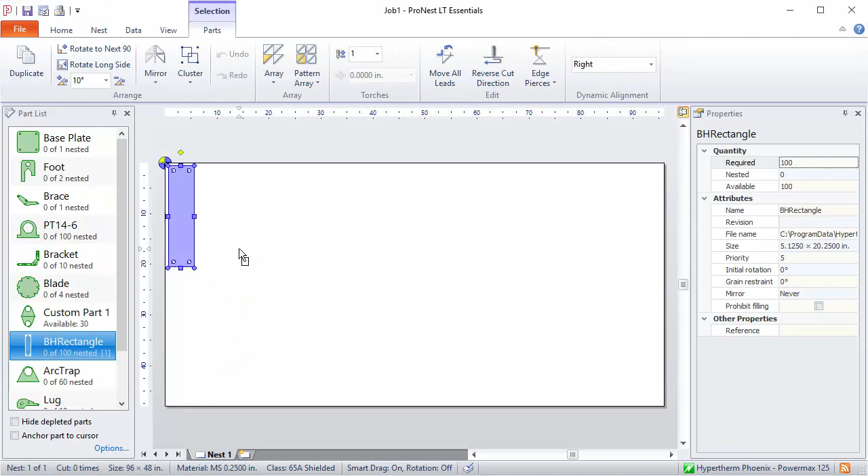Using the array feature, you can automatically place multiple copies of the part onto the plate in a grid. So let's start with this rectangular part here. I'll bring BH rectangle over. It's selected now and it's close to the nesting home. That's the upper left corner of the plate for me. All right, now on the Parts tab, I'll select Array.

Okay, and you can see that this rectangular part is now nested. It placed as many parts as it could in the array, and this creates a regular pattern on the nest. This is giving me pretty decent material utilization right now. So this was a good option for a rectangular part.

I could then bring parts over onto the nest, and fill this out. I could array this again, and ProNest will place that part in a regular grid. In this case, it was able to place 4 more parts. Now I've created a nest with good material utilization, so basic array was a good option for this part.

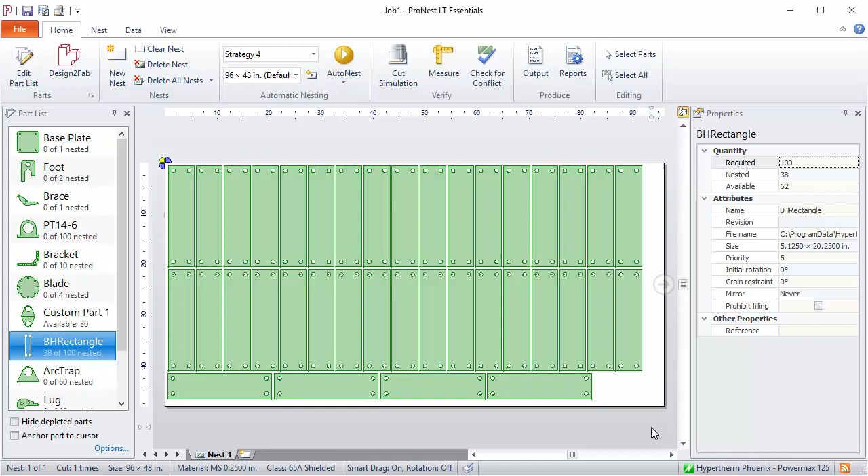But what if we have a part with a different shape? So I'll remove all of these parts from the nest, and let's look at this one here called PT14-6. Okay, so this part is now selected. It's close to the nesting home, and I will do an array.

All right, so the part is placed in a regular grid on the nest. The part is not rotated. It's not fit together with other parts on the nest. So this result is okay, but I probably don't have great material utilization right now.

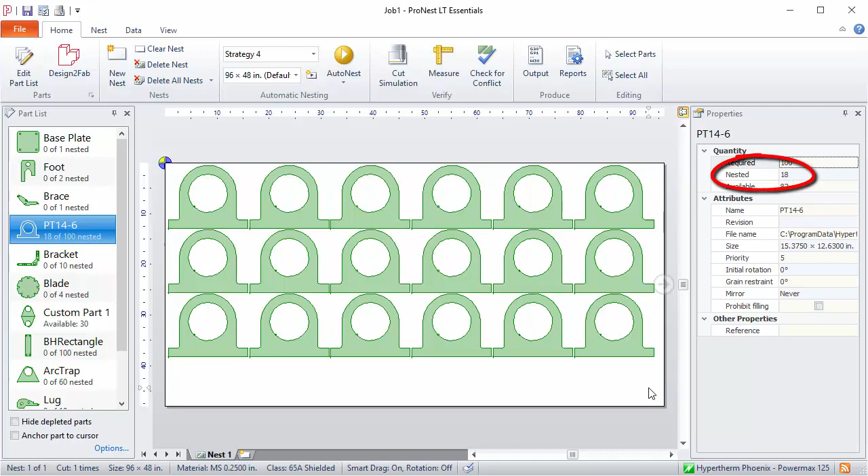We can look at the number of parts that are placed right here. Over on the right it says 18 parts nested. So that's a decent result, but we can use a different type of arraying to get a better result. So let's select all of these and remove them.

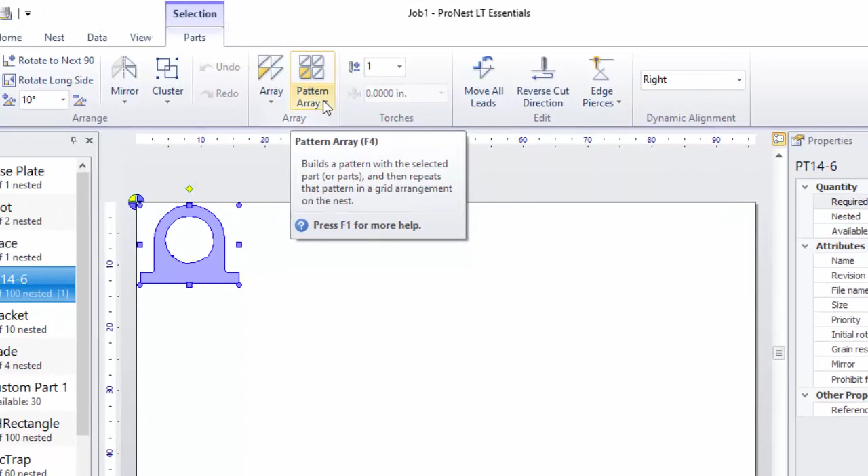This time we'll place the same part close to the nesting home, but on the Parts tab, select Pattern Array. So I'll click the arrow right now, and there are 3 levels to Pattern Array: Basic, Intermediate, and Advanced. The basic level is the fastest. It's also the least thorough. The advanced option is the slowest, but it also typically gives you the best result. And intermediate is just kind of a balance of the two. Let's select Advanced.

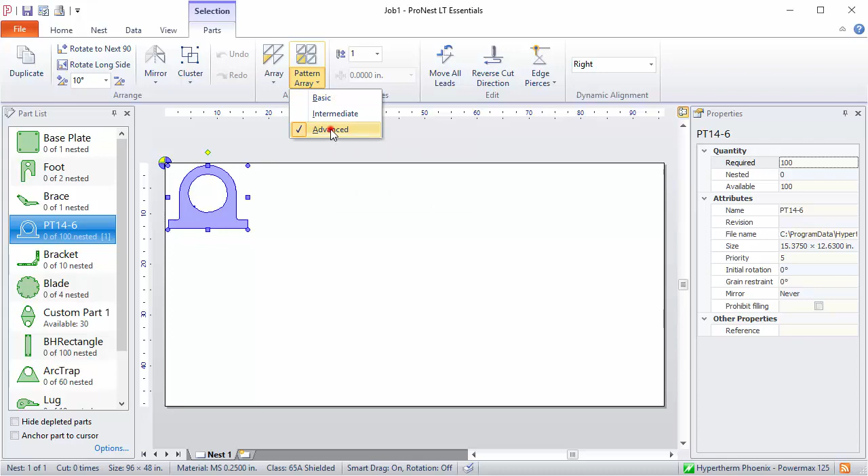Okay, so this is the result of a pattern array. Notice that the part is rotated from its original orientation, and there's a little bit better of a fit here between these parts. You can see over on the right that this nest has 24 copies of that part nested, compared to the 18 that were nested with regular array. So pattern array did a pretty good job with this particular part.

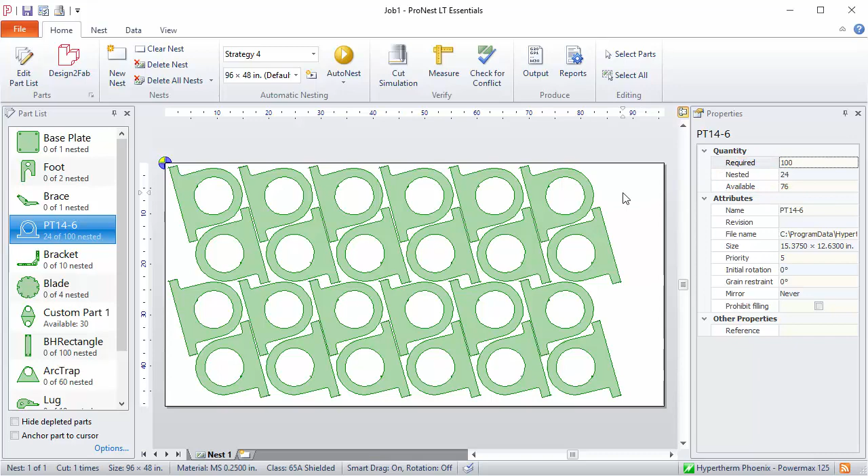All right, we can clear this now. You can also array or pattern array multiple parts. So earlier I created this cluster here containing 2 parts. Let's use intermediate pattern array for this one. All right, so now ProNest was able to pattern array that cluster.

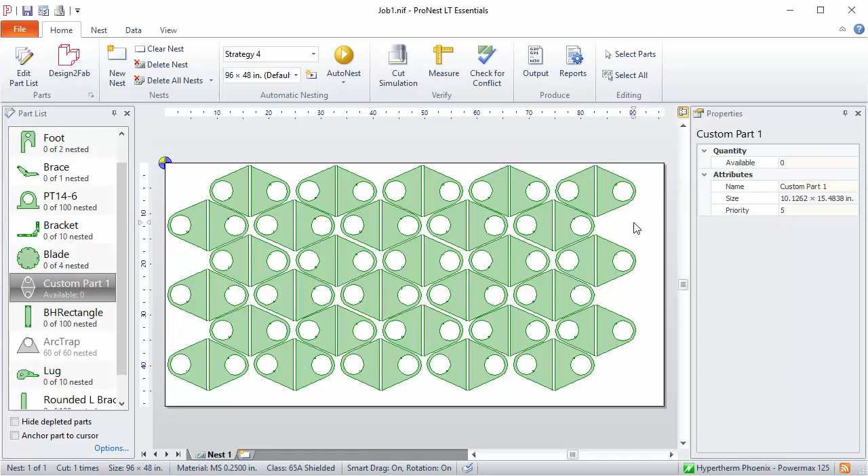Okay, let's remove these. You can also array or pattern array multiple different parts. So let's say you have some parts in an arrangement that you like. Just select them. This time we'll just do a basic array. And the parts are arrayed on the nest.

Next, let's look at dragging to create an array. With drag array, you can quickly place parts in a pattern array inside of a rectangular box on the nest. You can create different array configurations as you drag the mouse around and then see the results instantly. You don't have to wait for pattern array to complete and then see the results. So let's look at that now.

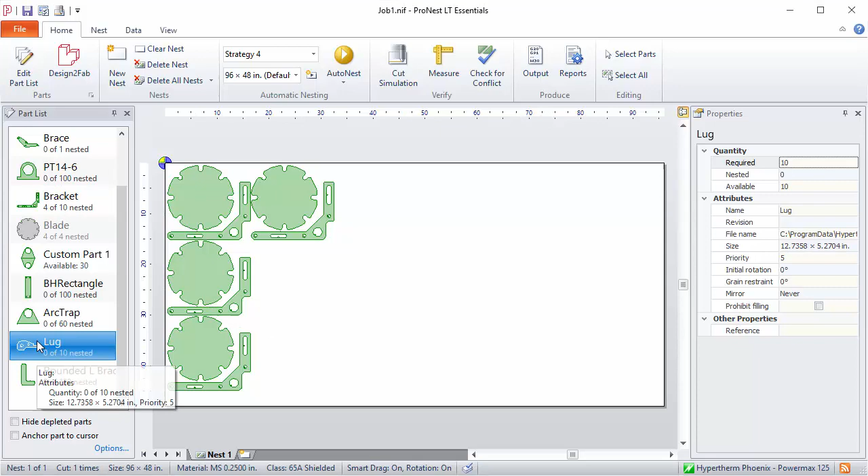I'll select this lug part. Let's add this to the nest. You can see as the part's selected, there's a yellow handle at the top. So I can click this handle and then just drag in the direction that you want to create the array. So I'll drag down and to the right.

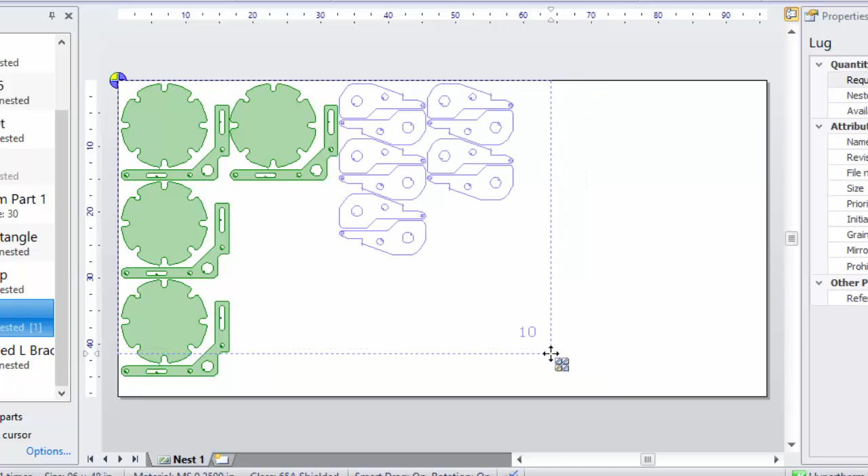Okay, now you can see that all copies of that part have been added to this array. There's a number indicator in the box. My number right now is 10. This tells me that there's 10 parts included in this particular array. All right, so you can just drag the mouse around to create a configuration that's going to work for you. And then just release the mouse to nest the parts.

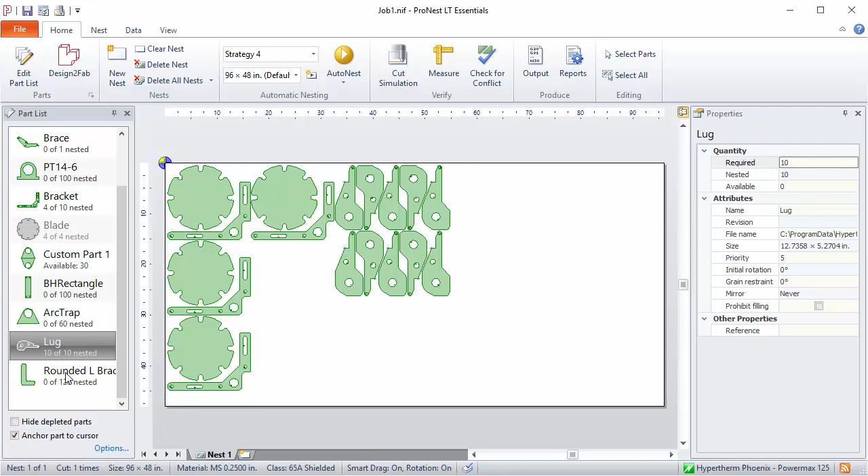You can also start a drag array with an anchored part. So if I turn anchor part to cursor on, and then I select a part, now this part is anchored to the cursor. All I have to do is click and drag to begin creating arrays. So I can create pattern array with this one here by just clicking and dragging, and then you can see the results instantly on the nest. So now I have 30 of these parts in the pattern array, and just release the mouse in order to nest them.

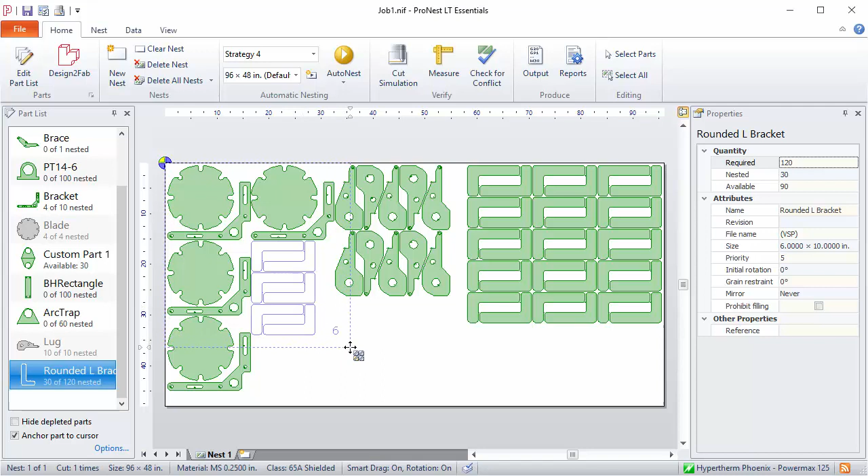If you want to control the direction of the array, that's controlled by the direction that you're dragging in. So if I start here and click and drag down and to the right, the array will begin at the opposite corner. So in this case, it will begin at the upper left.

If you want to control where the array starts, you can just hold the control key and then click and drag, and the array will begin from the point that I clicked at. It won't begin at the corner of the plate. So that can be a handy tool. It gives you a lot of control over the array, and you can also see the results as you're creating the array.